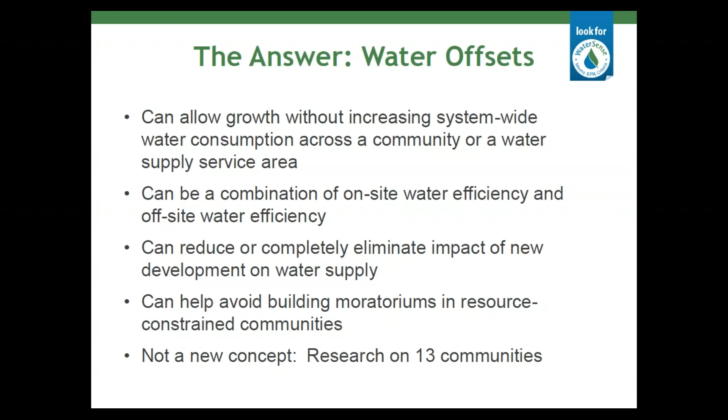As I mentioned, it's not a new concept, and even in water, we've seen that there are 13 communities around the country that have done offsets in various ways.

Next slide. So what we decided to do at the Alliance for Water Efficiency was build a national template ordinance, a planning and zoning ordinance that could help communities who wanted to adopt a water offset strategy on a voluntary basis. So we built an ordinance tool, not just a straightforward model ordinance, but one that you can amend and adjust to the variety of settings that might be occurring in your community, county, or any regional area that might want to apply this.

So we anticipate a number of different settings and different types of users, not just developer lawyers, but members of the community as well, to help a community stay as water sustainable as they possibly can.

Next slide. So the pieces of the ordinance are shown here. I won't go into detail since I only have a few minutes, but we'll give you a link at the end where you can go take a look at all of this. As you can see, it has all the legal pieces of a typical planning and zoning ordinance.

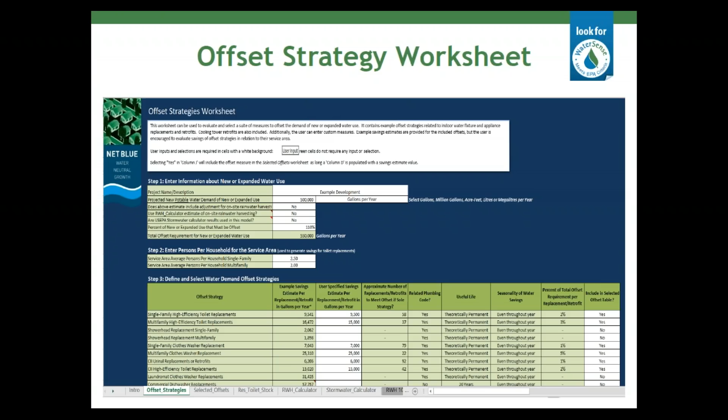Next slide. But the big piece of this is the offset strategy, and we've developed a workbook that can help developers and planning and zoning commissioners select activities that can provide offsets when done off-site. These include outdoor irrigation strategies that can be applied elsewhere, and green infrastructure strategies for rainwater and stormwater. They're all included in this strategy worksheet.

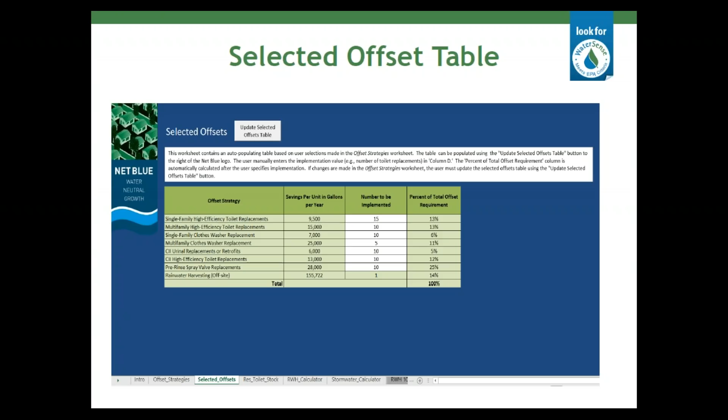Next slide. The sum total of what would be chosen would be selected to meet whatever the requirement is in the ordinance. As you can see in this offset table, this particular list of strategies meets 100% of the potable new water demand of a development. And it doesn't take a lot of different strategies. It can actually be a fairly inexpensive way for a developer to meet this requirement, and also a way for a community to fund its water efficiency program.

Next slide. To try to explain how this works, we developed 3 different examples showing how the ordinance can be applied and how the offset methodology works. The examples are all different so you have a range of types of development and types of governance structures. But I think all of the examples show that the offsets are often not very onerous and can be a really good way for a community to accept economic growth without having to suffer water consequences. We've developed detailed user guides for both the ordinance and the methodology workbook.

There's a picture on the slide of the methodology workbook. All of this information is available free of charge. If you go to the next slide, we've posted it all on our Alliance for Water Efficiency website. We also have a separate URL for it, which I'll give you at the end, because eventually we want to build a standalone website for this program. When you go to the website, you can request a package of materials be sent to you, and we at the Alliance also offer support.

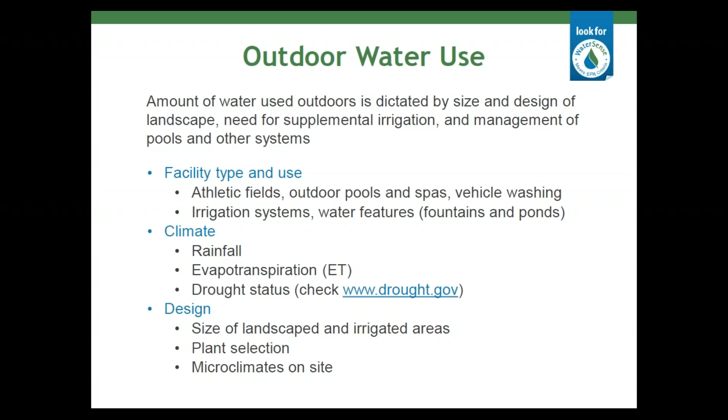As much as 50% of the water residents use outdoors is wasted due to overwatering, poor irrigation design, improper system installation and management, lack of maintenance, and improper scheduling.

When designing a landscape, keep in mind green infrastructure components that could reduce runoff and decrease the irrigated area. Installing WaterSense labeled spray sprinkler bodies can reduce outdoor water use, and weather-based irrigation controllers can properly schedule irrigation to avoid unnecessary watering.

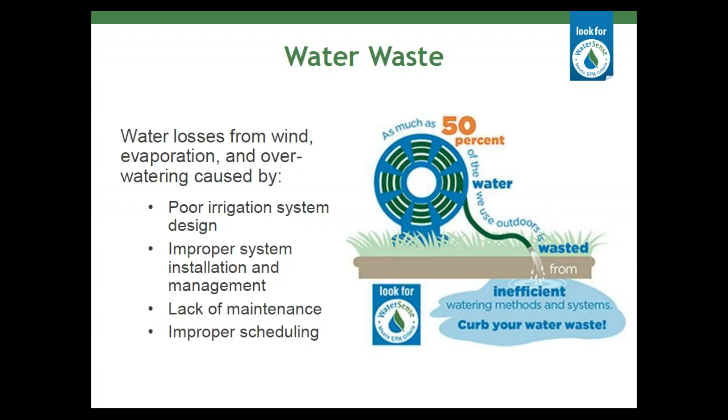Weather-based irrigation controllers help reduce water use by scheduling irrigation for when it is necessary. WaterSense labeled controllers use data from local weather stations or rain gauges on site to start or cancel scheduled irrigation. Controllers can also be connected to other external devices such as soil moisture sensors or ET sensors for more accuracy.

Spray sprinkler bodies are the part of the irrigation system that connects the sprinkler spray head to the water line. They work by maintaining a constant output pressure under varying conditions of incoming pressure. Proper pressure conditions reduce misting and overspraying from the emitters.

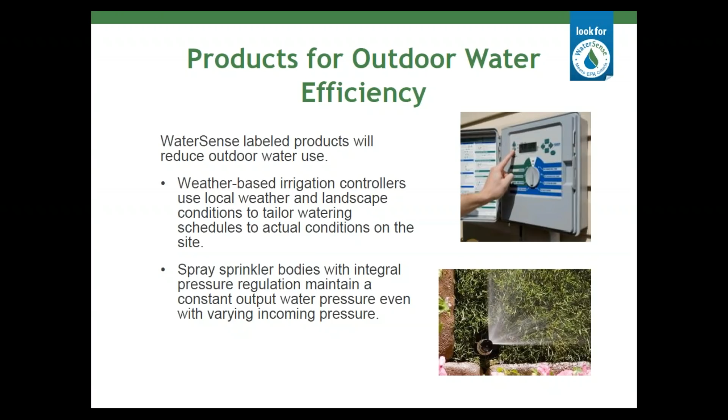The WaterSense WaterSmart Landscapes Guide was developed to help irrigation professionals identify water-efficient practices for residential landscapes. Our Best Management Practices Guide for commercial and institutional facilities, WaterSense at Work, has useful tips landscape managers can use to manage outdoor water use.

Water-efficient practices included in the guide, such as xeriscaping, using native and low water use plants, and installing WaterSense products, are great ways to save water. Additionally, installing green infrastructure such as rain gardens can be combined with native and low water use plants to increase water efficiency and decrease runoff.

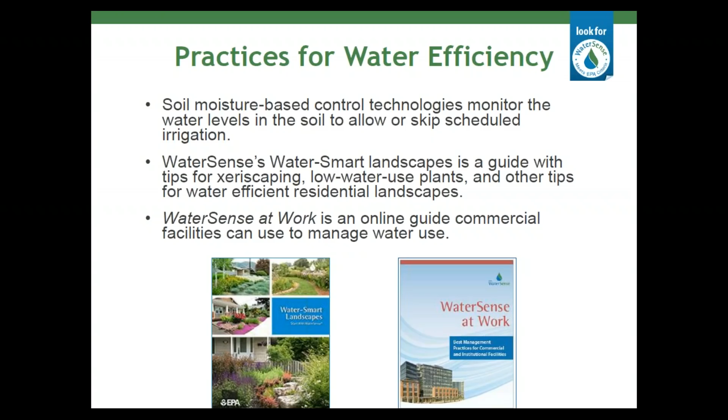WaterSense has developed two new guides to help inform irrigation professionals and homeowners of the benefits of microirrigation. The first is a mini guide for irrigation professionals, providing details on how to plan an irrigation system with microirrigation, tips for installation, and key things to look for when troubleshooting. The second is a guide for homeowners, providing an overview of microirrigation for the do-it-yourselfer and considerations if they need to ask a professional.

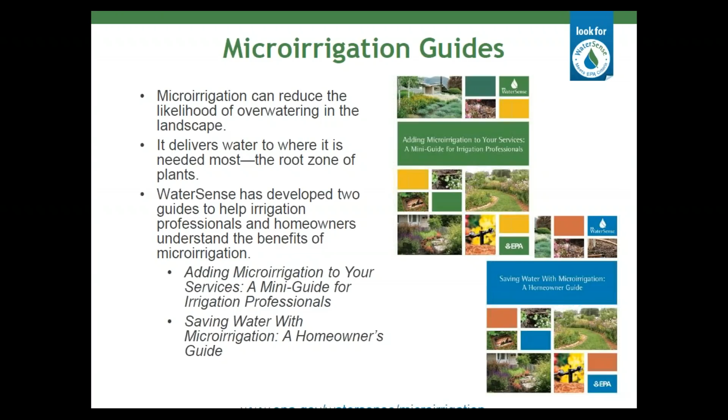Green infrastructure is an alternative to moving stormwater away via conventional piped drainage and water treatment. It treats stormwater at the source by using vegetation, soils, and other practices to manage water. As communities grow and water demand increases, water resources can get stressed. Incorporating green infrastructure into the landscape design can not only reduce runoff, but also save water to be used more efficiently.

Rain barrels collect stormwater that would normally be directed towards storm drains. The water collected can later be used for irrigation, reducing the need to use water supplied by the city. Stormwater can also be redirected to a rain garden instead of the storm drain.

Rain gardens are usually designed with soil that is porous enough for water to naturally infiltrate quickly, and plants that can survive high water levels during storms. The plants should be native to the region so they do not require more water than provided by rainfall. Because the rain garden uses plants that can survive based on local rainfall levels, the total area of the landscape requiring irrigation is reduced, and remaining irrigation water can be diverted to other uses.

A major source of runoff during storms is from hardscapes such as roads, sidewalks, and rooftops. Green roofs reduce the area in the city devoted to hardscapes. Extensive green roofs are 2 to 6 inches deep and often do not need supplemental irrigation. Intensive green roofs are 6 inches and deeper; they can support a wider variety of plants but usually require supplemental irrigation.

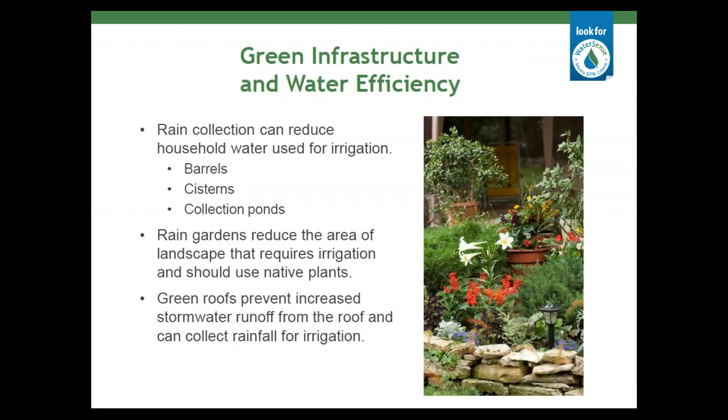Whether you are building a green roof, a rain garden, or planter boxes, we encourage you to use native plants. A native plant is a species grown in the region without human introduction. In the U.S., each region has its own climate, topography, geographic features, and soil. This wide variety of features means there is no one-size-fits-all approach to selecting plants. Native plants have grown accustomed to the region and are more adapted to local weather patterns.

For example, plants in western states can survive in hot, arid environments with little to no rainfall for long stretches of time. Bringing those plants to the East Coast, with cooler temperatures and higher rainfall, would be out of their natural environment. Because native plants have developed based on their local environment, they are less likely to need supplemental irrigation, which will save you money. Native plants are more suited to local conditions and require less fertilizers and pesticides that could run off into lakes and rivers in the watershed.

Next, we will have our featured speaker, Stacy Erickson from EPA Region 8 in Colorado.

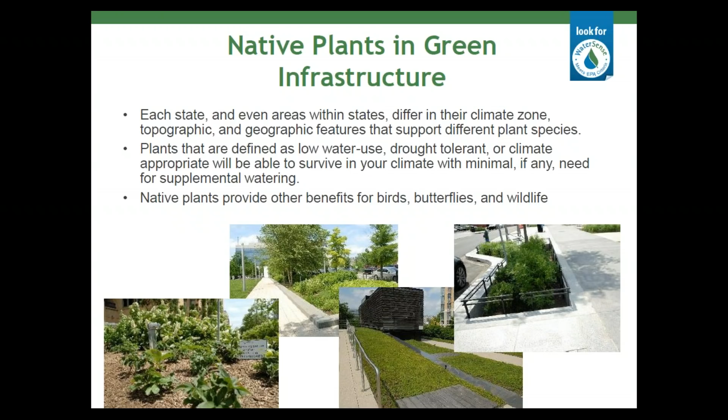Hi, everybody. As mentioned, I work in Denver, Colorado. EPA Region 8 covers some western states: Colorado, Utah, Montana, Wyoming, and North and South Dakota. So the photos that I'm going to be showing you are all from our region.

The first photo that you see there on your slide is actually EPA Region 8's green roof in downtown Denver, across from Union Station, and it uses sedums in a modular tray roof structure. It does require some supplemental irrigation.

A lot of partnership programs that we work with across government agencies, including HUD, DOT, FEMA, and the Army Corps of Engineers, just showing you the breadth of some of the things that we work on. A lot of these are incorporating sustainability and smart growth practices into affordable housing, hazard mitigation planning, and long-term disaster recovery, which includes green infrastructure.

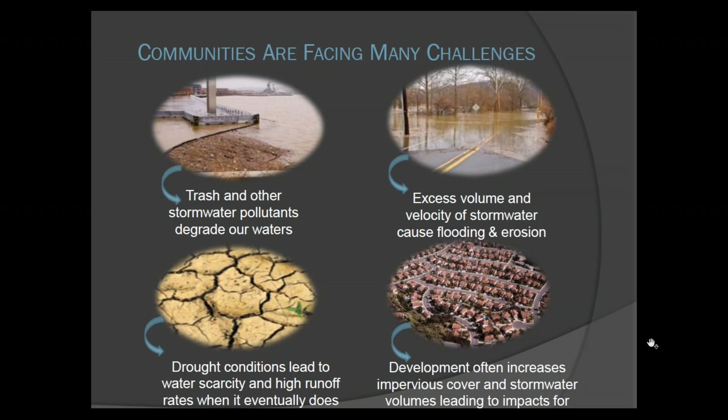So green infrastructure is really looking at stormwater as a resource, trying to manage the stormwater as much as possible on site, and trying to reduce pollutant loads that go into water bodies. It's really a multifunctional infrastructure that's much more cost effective.

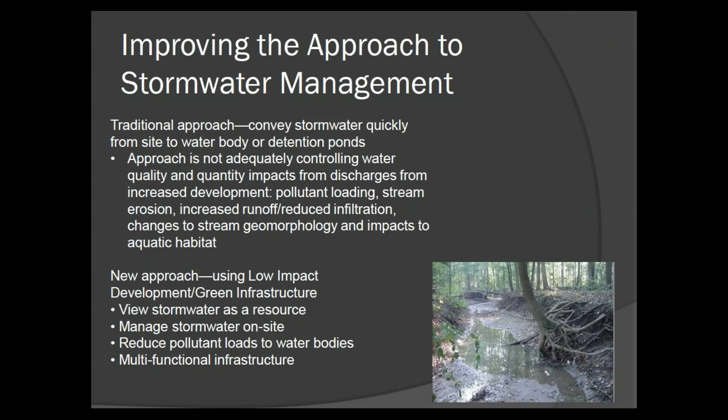Low impact development is another term that's used a lot. It's basically looking at comprehensive land planning and trying to look at the pre-development hydrology of a site and trying to mimic that as much as possible. It can happen at multiple scales, whether you're conserving or protecting forests to be used for source water and drinking water.

Doing riparian protection or restoration, same with wetlands, or it can be more of an urban focus. So green infrastructure actually works across multiple scales. It's a very sustainable stormwater practice. It can be applied to development, redevelopment, or retrofits. It tends to be less expensive if it's integrated on the front end.

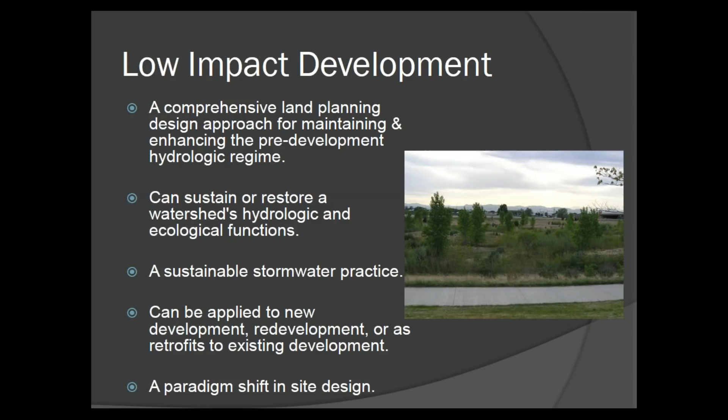The picture that you see right there is actually Denver, Colorado. It's the old Stapleton Airport, which is where I live. This is actually a regional stormwater detention facility off of Interstate 70 behind Super Target and the Bass Pro Shop in the Northfield Shopping Center. It's actually a really lovely green infrastructure area. There's paths down there, benches, coyotes, foxes, a lot of bird life, and so it serves multiple functions.

As mentioned earlier, green infrastructure is really about trying to mimic natural processes, and that includes infiltrating, evapotranspirating, or reusing stormwater or runoff on site. It can be used at a lot of different landscape scales, as I mentioned earlier, and can be used for conservation efforts as well as restoration efforts.

The photo that you see right there is Westerly Creek in Stapleton, Denver, where I live. This is actually a few blocks from my house. This stream was completely under taxiways and runways in a culvert under concrete and asphalt. It's been completely restored and daylighted, really good green infrastructure. I'll show you some other pictures later about what it looks like when it functions with a large amount of stormwater.

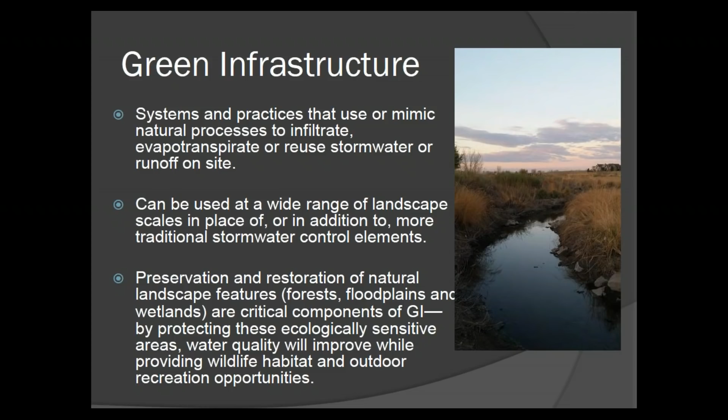Green infrastructure builds resiliency for communities. It can save money. It recharges groundwater. Using cisterns and rain barrels reduces municipal water use. It helps reduce urban heat island effect and can help protect against storm surges.

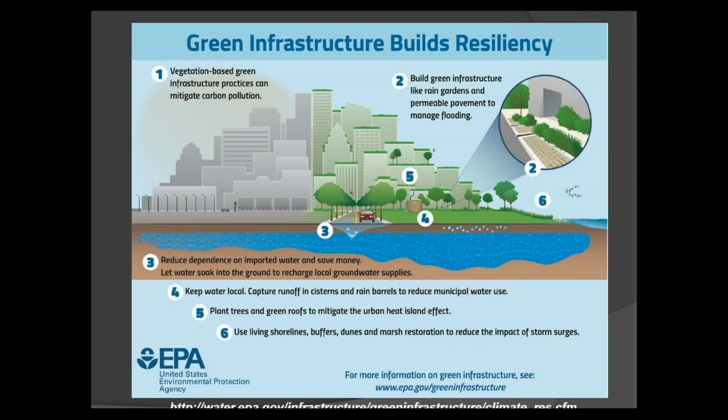So green infrastructure is also really about systems thinking. For folks that are familiar with sustainability concepts and systems thinking, green infrastructure has a bigger impact when it's holistically integrated with other infrastructure. It's also multi-benefit infrastructure and is much more cost-effective. We like to say a lot that with stormwater, we want to slow it down, spread it out, and soak it in.

A lot of towns have used green infrastructure. It can be used in a lot of different practices and things that are already going on that folks already do. Things like parks, open space, urban forestry, parking lot landscaping requirements, climate adaptation strategies, resilience strategies, and flood restoration.

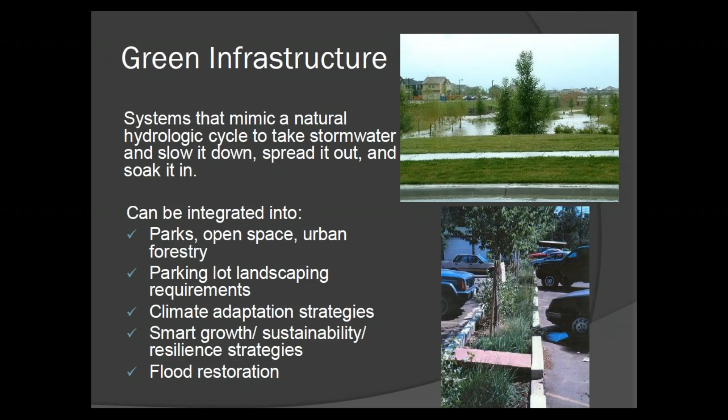The bottom photo that you see there is a parking lot in Boulder, Colorado that uses landscaping and curb cuts to actually take the stormwater runoff from the parking lot and water the landscaping there.

There's a lot of different types of green infrastructure. There's a lot of terms that are sort of synonymous and similar, but green roofs, planter boxes, rain gardens, bioswales and bioretention cells, vegetated swales, tree trenches, ponds, porous pavements, green streets, wetlands and riparian areas, and rainwater harvesting.

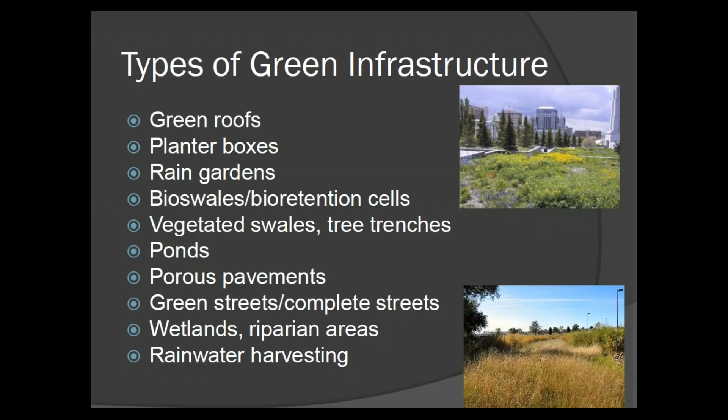The photos that you see on this particular slide, the top one is the green roof for the Church of Jesus Christ of Latter-day Saints in Salt Lake City, Utah. It's a really lovely green roof with a lot of flowering plants on it. And the lower slide is actually Fort Carson, Colorado, which is an Army base here in Colorado.

Green infrastructure is really good for a lot of things besides stormwater management. I think I've mentioned some of these, but climate adaptation, reducing urban heat island, biodiversity, improving air quality, improving water quality, improving soil quality, and recreation and quality of life.

The top photo that you see there is actually a development in the River North neighborhood of Denver. It's right along the banks of the South Platte River. It's a site called Taxi, former brownfield site that has done a lot of sustainable redevelopment. It's now become one of the hippest and coolest areas of Denver, but you wouldn't know that their stormwater is being managed by this. It looks like sort of really beautiful landscaping. And the bottom photo is, again, Fort Carson, Colorado, and that's a bioretention cell that has irises in it.

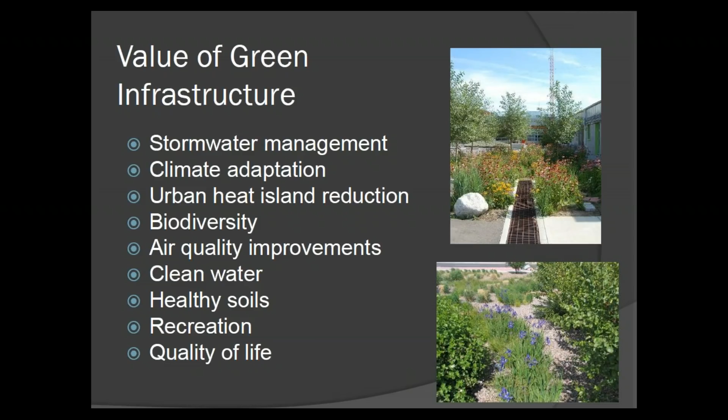There's a lot of additional benefits to green infrastructure. Some of these have been mentioned already, so I won't go into them again, but reducing sewer overflow events - we don't have hardly any combined sewers in our EPA region, but a lot of places east of the Mississippi and also on the West Coast actually do have combined sewer overflows.

And so green infrastructure is a great complement to the gray infrastructure. There's increased carbon sequestration, reduced energy demands on buildings, improved human health, increasing land values. Permeable pavements tend to have less splashing, spraying, ponding, and noise, and also fewer pollutants coming off of them. It tends to be much more aesthetically pleasing, and it really is a community amenity, and it makes communities more resilient.

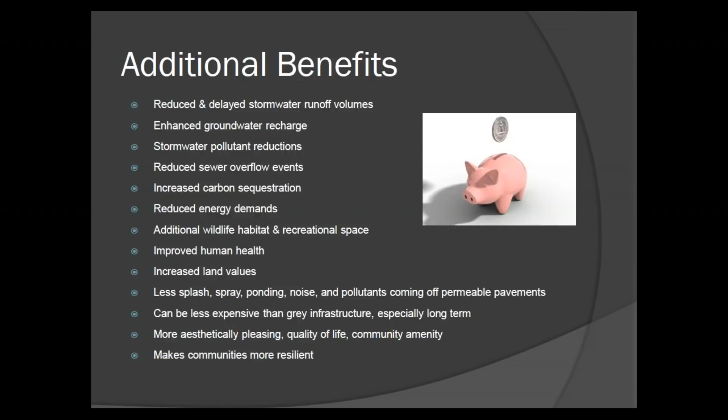I'm not going to go into these in great detail. A lot of these are more for your reference later on for some of these websites. But there's been a lot of discussion about the cost of green versus gray infrastructure, and particularly when you look at long-term, green can be less expensive. Retrofits tend to make it a little bit more expensive.

The photo that you see there is actually Denver Housing Authority, the affordable housing developer for Denver. That is their Park Avenue redevelopment. And because it's fairly urban, they were having to put in stormwater vaults at a cost of typically around here - a few years ago, stormwater vaults were around $850,000 to $1 million. By using green infrastructure, they were able to reduce the cost of that.

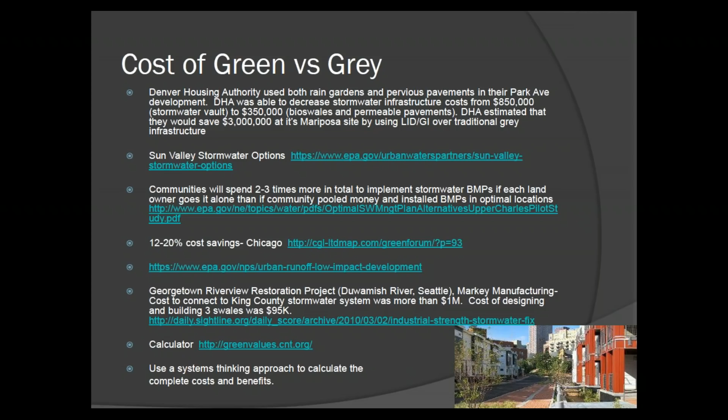EPA's Region 8 building actually has a smaller stormwater vault because we have a green roof on top of our building, and they were able to size it much smaller. Stormwater vaults are used in a lot of very urban redevelopment where real estate is quite expensive. They're not much of an amenity. Ours is in our parking garage. It's not anything particularly great to look at, but something that has to be done to manage stormwater.

A lot of different ways to get to green infrastructure, including regional stormwater planning, stormwater ordinances, zoning and building codes, looking at shared parking, if there are development requirements for volume reduction, which some places have, minimizing street setbacks, bioretention requirements, urban tree canopy, riparian setbacks, looking at street width and parking lot requirements can help you get to green infrastructure, and then changing water and stormwater pricing structures in order to incentivize the use of green infrastructure.

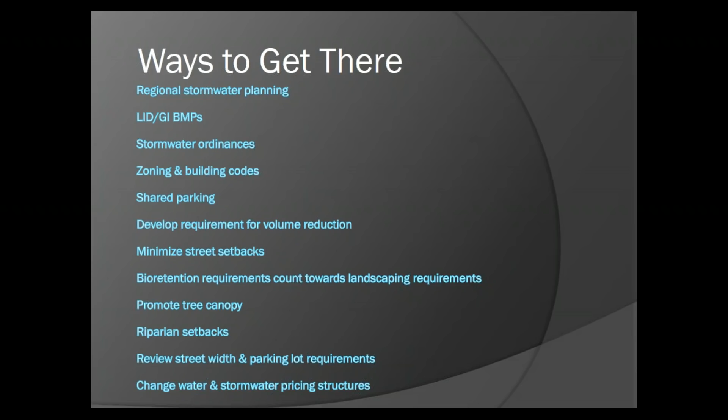Green infrastructure in the semi-arid West is a little bit different. This is always interesting for me. I work with a lot of folks on the East Coast, but in a semi-arid or arid climate, there's quite a bit of difference. Denver has 15 inches of precipitation a year, over 300 days of sunshine, and there's a lot of infrequent but very intense storms.

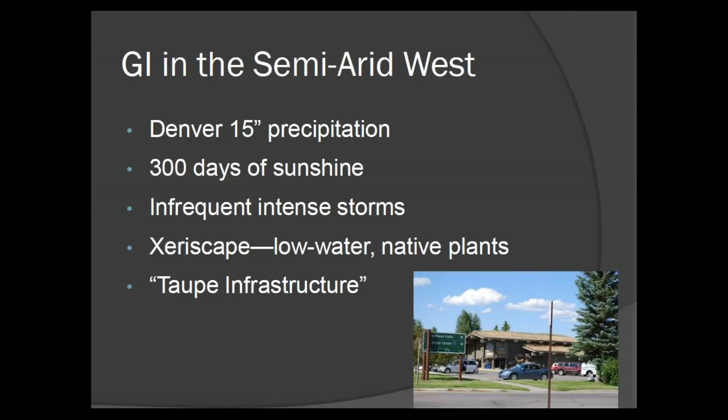And so xeriscaping with low water native plants is really important. Sometimes it doesn't always look as green as it does in other places like Portland, Seattle, or the East Coast. So sometimes we call it taupe infrastructure or brown infrastructure out here. And the photo that you see there is a sod roof in Jackson, Wyoming. Sod roofs are widely used in Norway and are a type of green roof.

In the semi-arid West, as I mentioned, we don't have a lot of combined sewer overflows, so we don't have the ability to use consent decrees to compel people to use green infrastructure. So our uses of green infrastructure in our EPA region are all about voluntary approaches. Also, Western water law is quite a bit different than Eastern water law, so prior appropriation means that someone else downstream may own that water. We also have a lot of clay soils, which can impede infiltration, so it's really important to design and engineer for infiltration, and site-specific design and installation is really important.

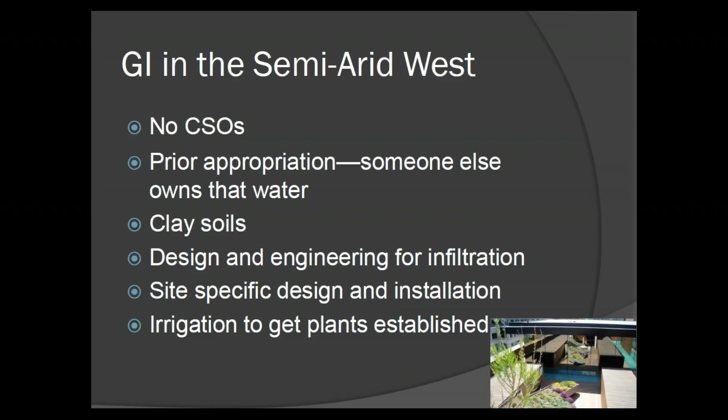A number of barriers to green infrastructure exist in the semi-arid West. There's been a lot of discussion around design, construction, and maintenance costs, and a lot of different mixed messages from different government agencies and departments. Typically, public works departments tend to control stormwater, while parks departments tend to manage more green infrastructure and open space.

There can be a misperception on the economics of green infrastructure. Not doing regional and site planning can make it difficult to incorporate at the tail end. Sometimes it's just difficult to get people to trust something new if they haven't done it before. And then again, irrigation can be an issue because you do need to get the plants established, so you need to install irrigation infrastructure, which costs money on the front end.

The top photo you see is Stapleton, Denver again. Those are street medians with running paths. The bottom photo isn't the best one I have because it doesn't show much—it was taken early on before the infrastructure was established—but that's Odell Brewery in Fort Collins, Colorado, with curb cuts used to capture stormwater to irrigate a lot of the plants.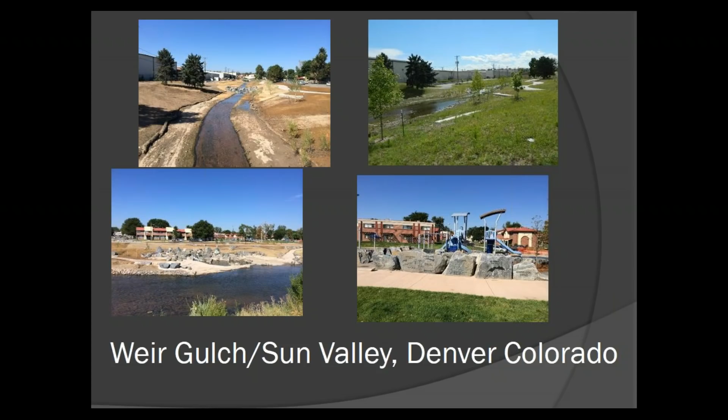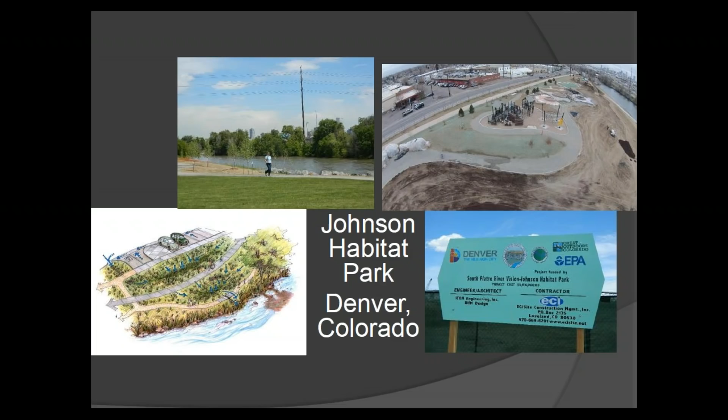They actually looked at what would happen if they were able to acquire a couple of other pieces of property. The great thing about this design was that it could actually infiltrate all of the stormwater on site in sort of normal storm events.

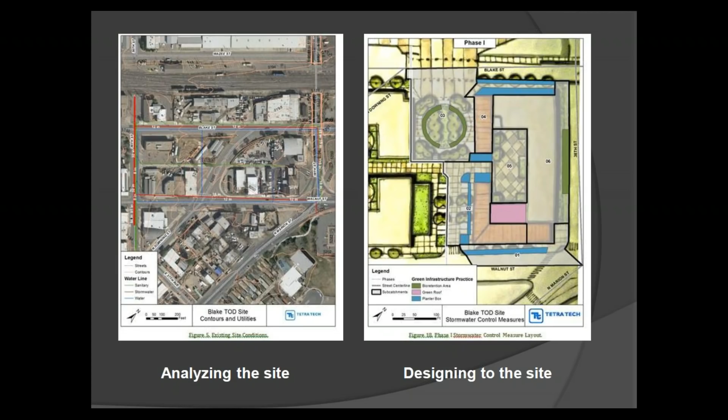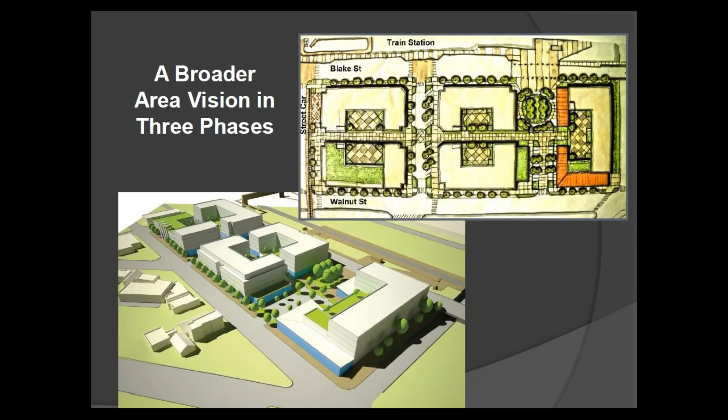These next two slides are essentially trying to show how it's really important to engineer and design the infiltration correctly, and make sure the soils and everything can do what they're supposed to do so that you know how much stormwater each of those practices can manage.

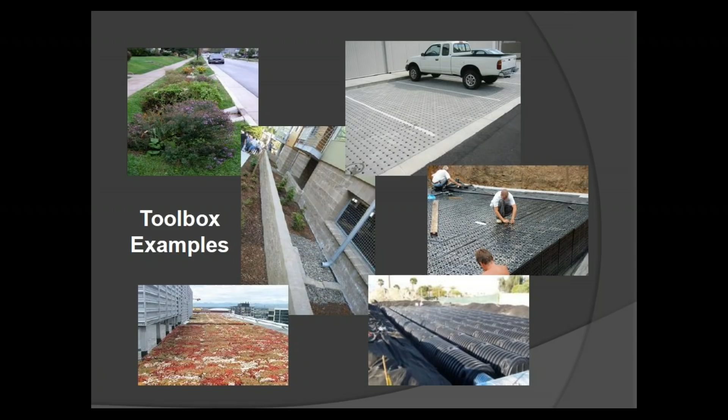Again, this gives you some ideas of how much stormwater each of these different practices can actually infiltrate.

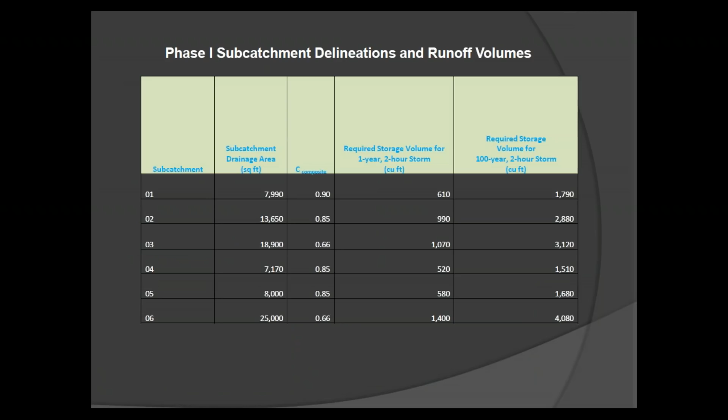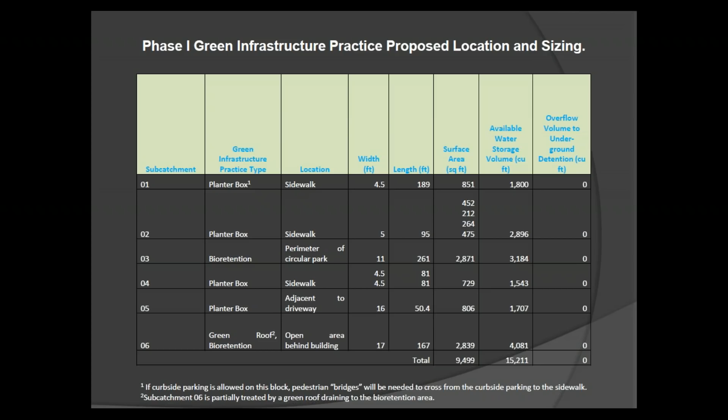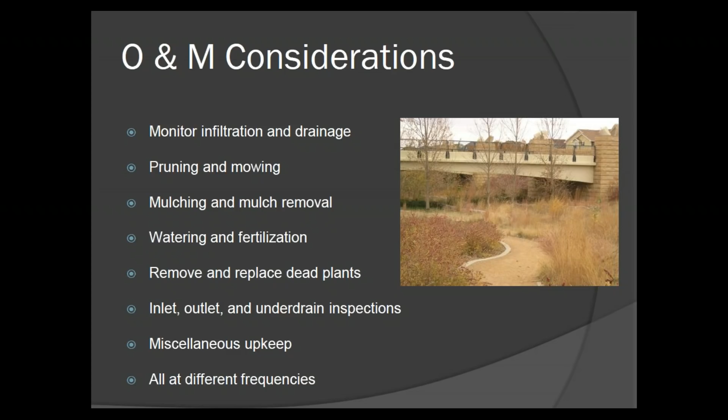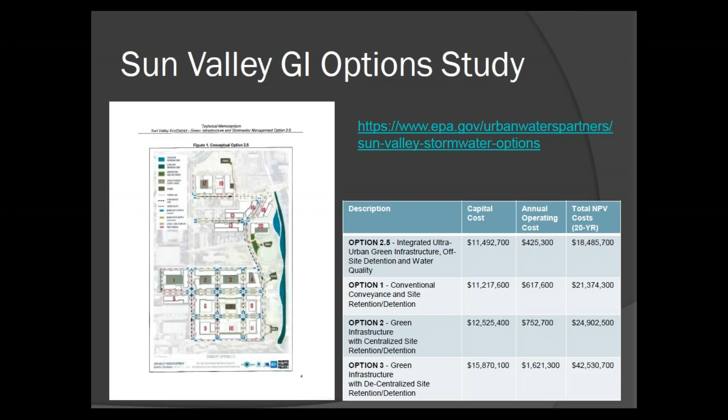And that was it for my prepared slides. I think we're moving to questions next.